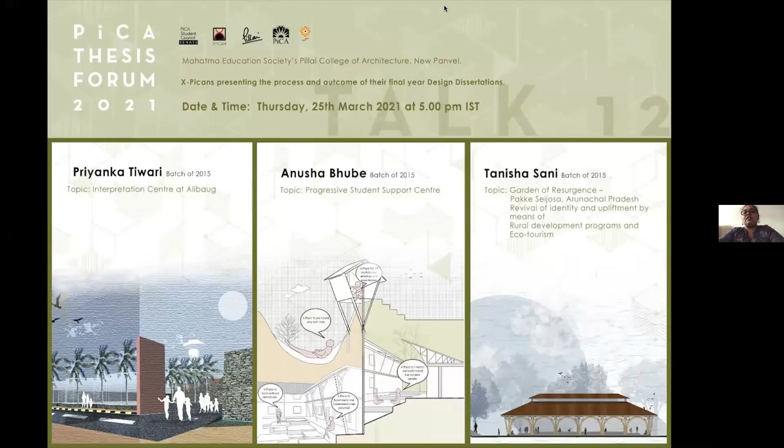Hello, am I audible? Yes, ma'am, you are.

Sorry. So Anusha will be talking about her experience designing Progressive Student Support Center, whereas Tanisha will be showing her project, which is titled Garden of Resurgence. Her site was in Arunachal Pradesh. It's basically a revival of identity and upliftment by means of rural development programs and ecotourism.

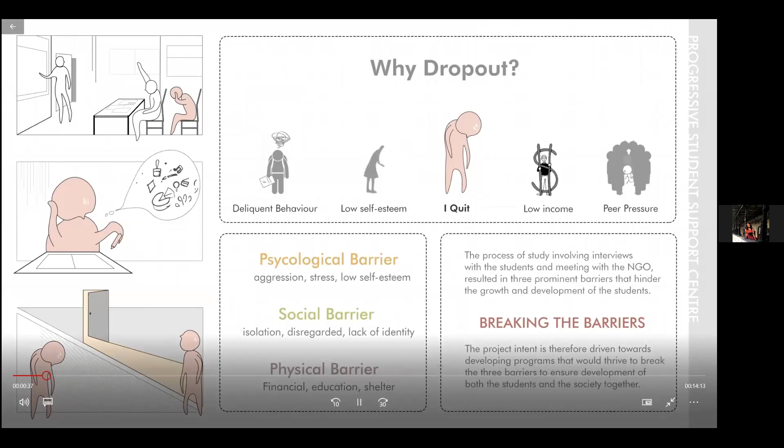This project is an attempt to aspire, nurture, and empower the dropout students. In order to achieve this, they need to be provided with a 24/7 positive environment. The idea is to impart education not only in theory but by actual physical exploration. The project caters to various age groups, which will aid to develop a sense of responsibility amongst the elder students. It inculcates sensitivity and preservation values, which can be done by the practice of sustainable living.

Maitrakul is the organization that this project is catering to. The organization is currently located in Bapgaon village, which will later move to the proposed site in the Bapsai village. The site location was extremely important in order to actually make a direct contribution to the betterment of the community and also in order to inculcate sensitivity towards nature. The site is located in the medium-sized village Bapsai near Kalyan. Although closer to nature and smaller communities, one still has access to Mumbai suburbs.

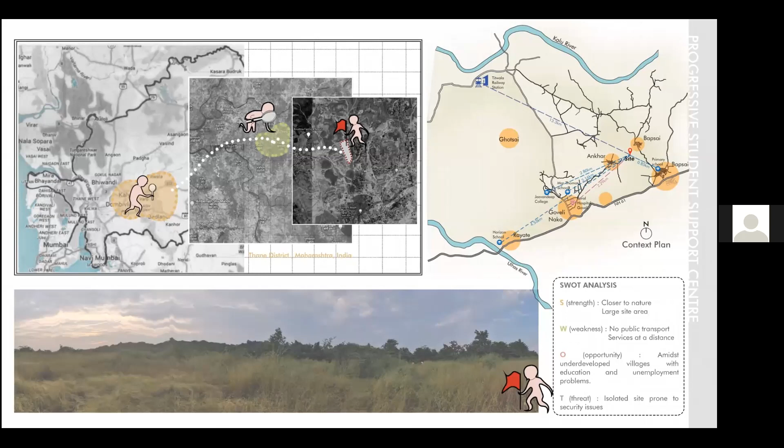Shikshantar and Vigyan Ashram contributed to understanding the user, workshop spaces, agricultural inclusions, and the incorporation of recycling in sustainable living. While SECMOL deals with student rehabilitation from a more hands-on exploratory learning approach. The inclusion of various types of institutions helped in designing an appropriate brief to cover all user needs. Kalyan having a history in Vada architecture, being the traditional residential form, the planning was done on the basis of the Vada concept, hence the grid planning.

The central large open space between the private and public space comprised of a green space, outdoor sitting or gathering space. Each space was provided with a semi-open space. The geometry allows for a proper distribution of public, private and interactive spaces. A concept of tree house was introduced as the students come from a disturbed background and this helps them relive their childhood. This space can be used for counseling units or for group study purposes.

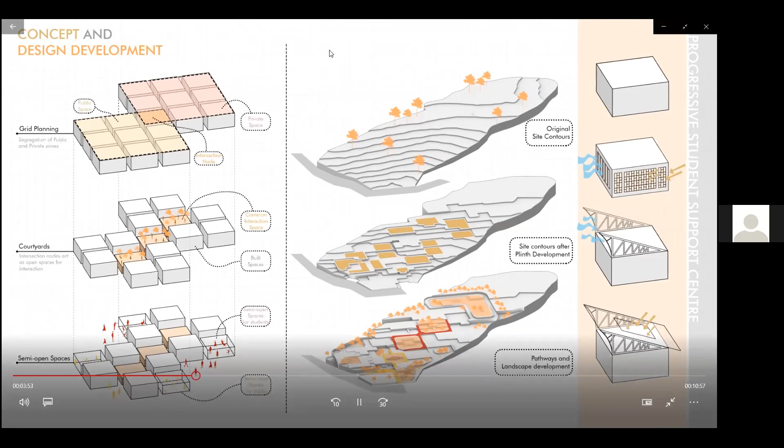The site is located in a rural context without a lot of dwellings around it. Agricultural fields are located adjacent to the site. The vehicular movement is restricted to the entrance, beyond which only pedestrian circulation is allowed.

The site has 3 entry nodes, 2 for vehicular circulation and 1 a stepped path that also provides for public seating or gathering spaces. The administration block overlooks the seating and keeps an eye on the entry and exits of the site.

A semi-open pavilion is placed adjacent to the main circulation path, giving an experiential view of the stepped courtyards. Right above the pavilion, an exhibition hall is provided for the public. The courtyard adjacent to it has a stepped pond which can be viewed from the pavilion and the exhibition hall.

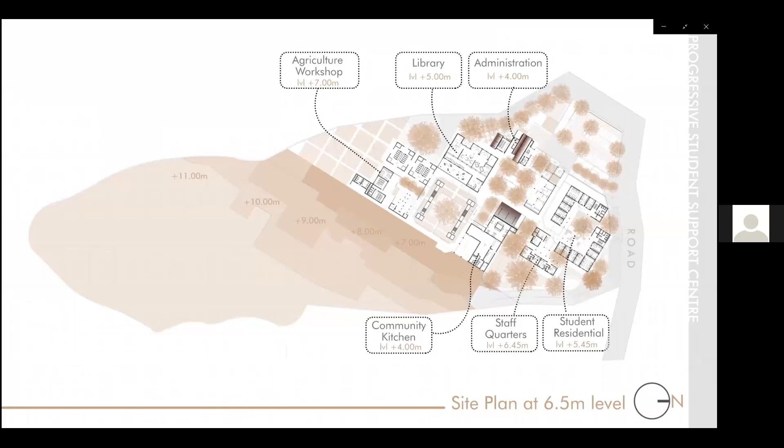The learning spaces start from the middle contours overlooking the two central courtyards. The agricultural block and the dairy are adjacent to each other with a private agricultural field provided for learning. The courtyard with bamboo tree houses overlooks the poultry farms in a main gathering space catering to events such as lectures in the open, performances, etc.

Such an informal space changes the dynamic of the learning in Maitrakul, catering to the needs of the children coming from disturbed backgrounds. The next set of blocks, carpentry and fabrication, sewing and electrical workshops, produce a lot of noise and disturbance and therefore are provided at the topmost contour away from the learning units such as the library. They overlook a stepped courtyard, increasing interactions amongst the various workshops.

Following are the learning units in the play area. This includes a cycle track and multiple grounds for different sports. The topmost end of the site is left untouched for future development.

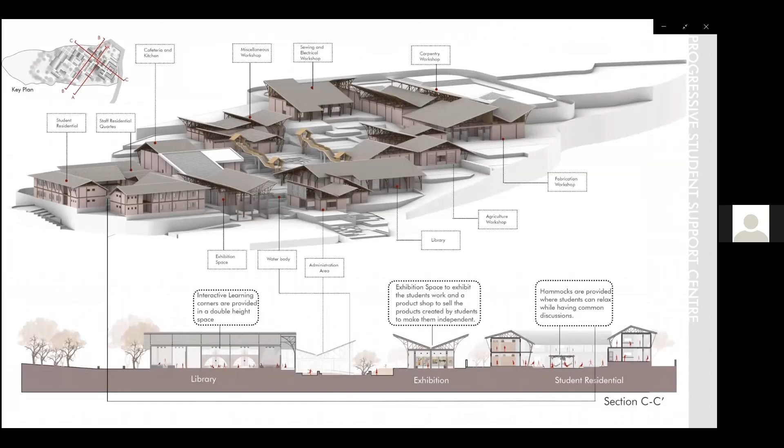The roofing of the blocks is designed to make the most of the natural light already available on the site. It also helps in differentiating and developing the public and private activities on the site. The administration's roof opens up on the outside as a welcoming feature for the outsiders. The pavilion and the exhibition focus the view of the visitor towards the central courtyards. Various spaces are designed at the landscape nodes in order to promote interaction among the students as well as the community.

The dynamic of the roof can be clearly understood in these site sections. The first site section shows the inclined roof of the kitchen, which provides an open public seating as opposed to the enclosed private dining below it. This open seating is the extension of the first courtyard, encouraging interactions.

The second section shows the privateness provided by the roof of the library from the public open space next to it. The library extends to a private node that provides a calmer environment to study in.

In the administration block, you enter a reception area which overlooks a small courtyard and the pavilion, which serves as an inviting waiting area. A small common assembly hall is provided to orient new students into the campus. The exhibition displays the work done by the students in Maitrakul.

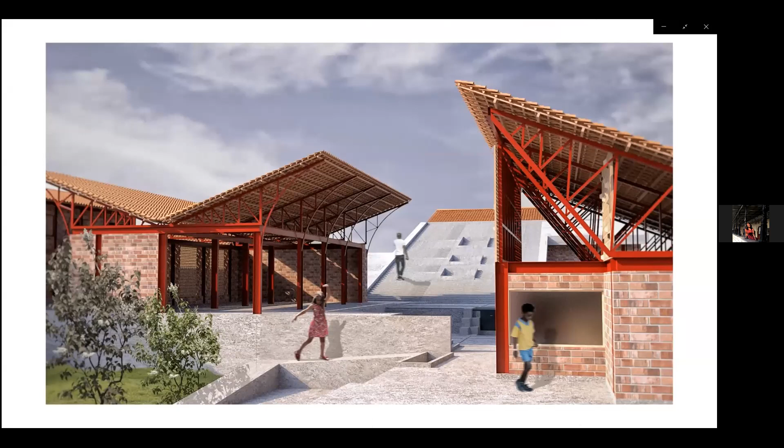The residential block has a central courtyard and the form gives it a certain privateness from the staff residential, making it much more comfortable, carefree places for the students. A similar stepped courtyard helps in unifying the different contours, creating interactive spaces.

There are two residential blocks of 2 stories consisting of 14 dormitories, one sanitation unit, and a staircase block separating the two. The slant columns that are attached to the roof are a feature of this block. The windows have a slight protrusion into the passage for an informal seating area.

The staff residential features an experiential corridor that connects to the rest of the site. As the staff is demanded to be aware of the whereabouts of the students, circulation becomes key in the designing of this block. The staff block consists of 6 units, each housing 2 staff members.

As a design element, a twin window system is provided to control the harsh sunlight that might enter through the south facade. This facade is made of a jali made of terracotta tiles that help in temperature control. A bamboo facade system is also used in these blocks to dissipate heat. These bamboo logs are replaceable.

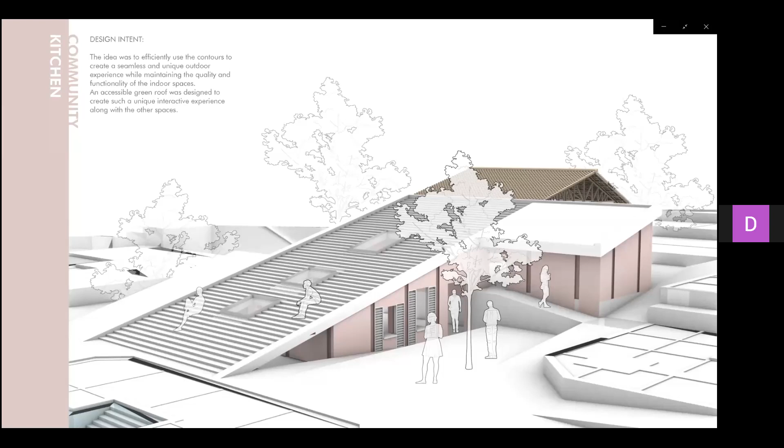Food is produced through farming and poultry as raw materials, further providing jobs to the women in the village for kitchen maintenance and cooking. From the main passage, a ramp goes down to the dining area. A foldable table unit is placed in the periphery, which makes the dining room more dynamic for mass buffets and other gathering events.

The library block contains reading tables, bookshelves, informal step seating units, and small booths for group study. These spaces have partition walls that do not go up till the roof. The feeling of seclusion is eliminated and this unifies all the functions of the library. The library opens out to the private garden to encourage outdoor studies.

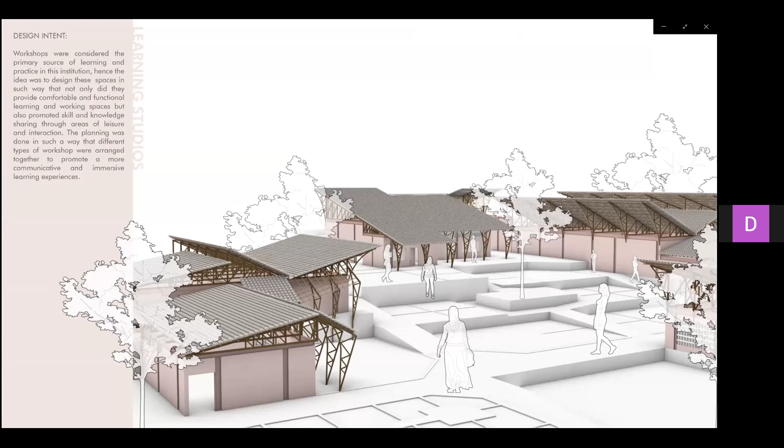Further are the learning studios, which are designed as a multi-access space where rudimentary education is provided for the dropouts to continue further schooling and gradually build their confidence. The varying sizes of the classroom spaces allow the social anxiety to be broken gradually and induce participation. The blend of nature and playscape gives the child a feel of learning in a park, which improves concentration and reduces stress.

An open plan is provided for the photography and art workshop with multiple spill-out spaces. A classroom for solar and biogas learning is also provided. The terracotta tiles cast a beautiful shadow in the photography workshop, which helps in the photography.

The agricultural block encompasses a poultry farm, classrooms, soil testing lab, a dairy, and a small private agricultural field for learning agricultural practices. A brick jali wall helps provide privacy to the classrooms, yet allows natural light to enter the space. The carpentry and fabrication workshops have a workspace area and they spill out to semi-open areas through revolving jali doors. The workshops are placed together due to the same design requirements, heavy lifting areas, noise reduction, and hands-on learning.

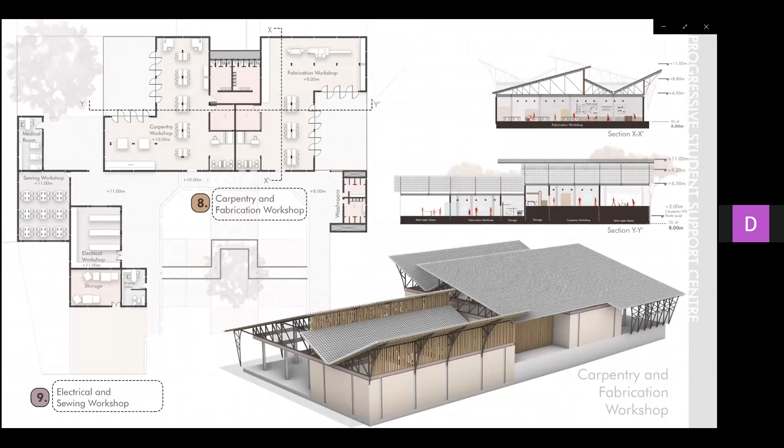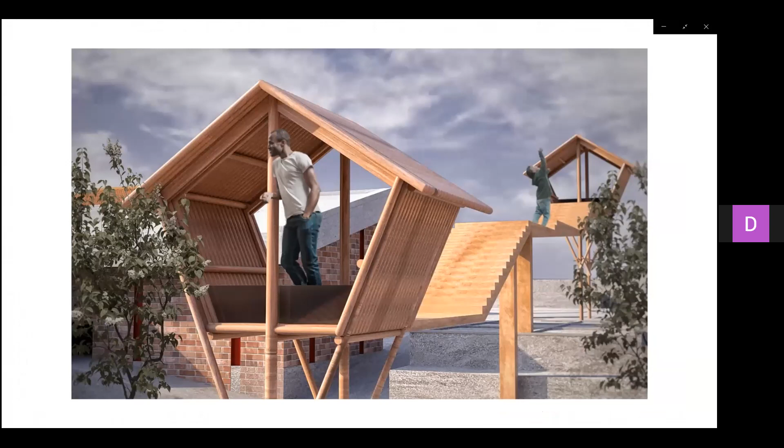Punctures have been provided in the roofing system to allow sufficient natural light to the spaces. An open plan is best suited for such workshops for different modes of teaching. An open space is provided in front of the electrical workshop for a motor workshop when needed. A first aid unit is also provided for safety concerns. Further are the AutoCAD details for the project.

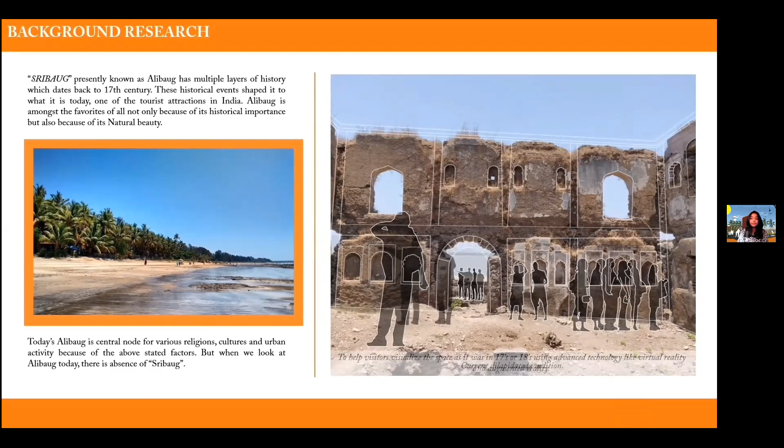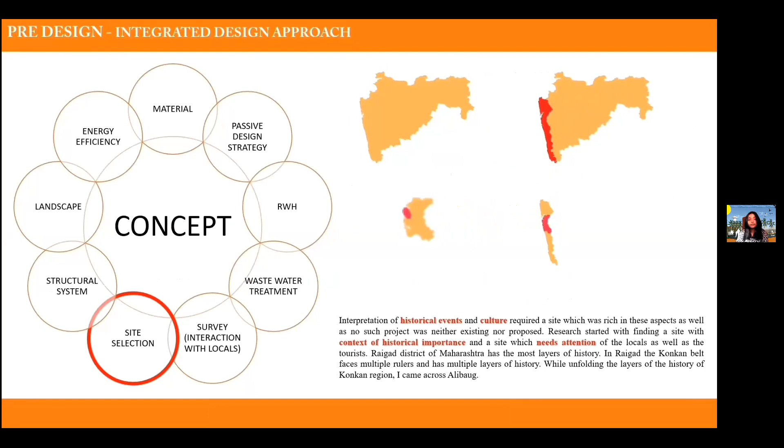An integrated design approach was formulated, starting from site selection, studying from macro level Maharashtra to micro level Alibaug. Site was selected based on the DCR, Google map and going on site. Site analysis was done. Site context was studied from macro to micro level. Kolaba Fort is just 1 kilometer away from the site, and the site is adjacent to the Alibaug beach. Other public amenities are within 1 kilometer distance.

Accessibility to Mumbai and Pune was studied both by water linkages and road linkages. Landscaping on and just around the site was identified and used for the proposal. Around 90% of the vegetation was retained as it is on the site. Local and traditional materials were identified and studied. Passive design strategies for Alibaug specifically were studied.

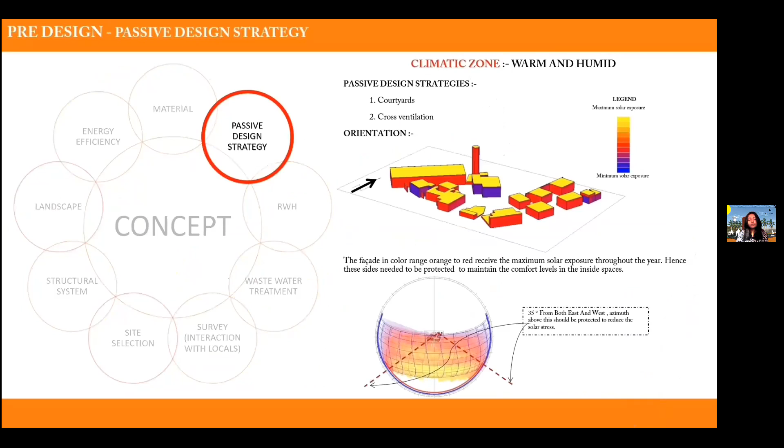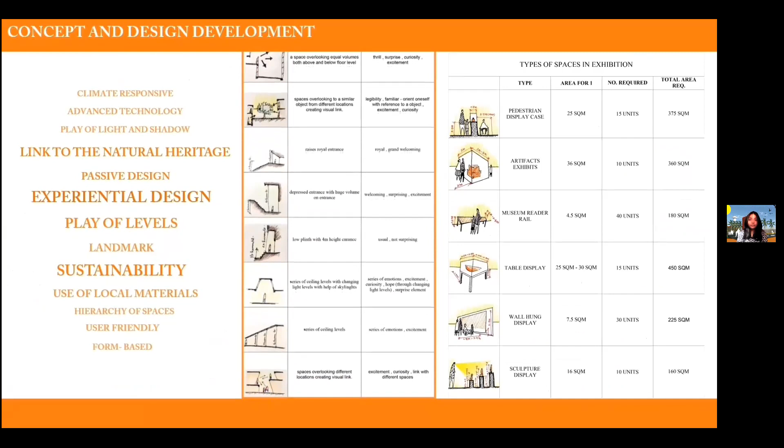Before getting to site zoning stage, a word cloud was made on my intentions and aspirations regarding the project. A study of volume, light and emotion was done. Types of exhibitions, its style, sizes, etc. was studied. Then the character of Alibaug was studied through a series of images within the city.

Few elements were abstracted to be used in design, namely the narrowing street, wooden joinery, watchtower, surprise element, abstracting trees, break spaces, traditional construction, development of spaces around the water bodies. With all these studies in the conscious mind, I moved on to site zoning.

In the site zoning, first the proximity chart was prepared between the blocks, namely admin, entrance, exhibition, library, workshop and convention. Second is the space and relationship diagram. Then the proximity and the space and relationship diagram were overlapped. To this, visual links were established and I came up with one bubble diagram.

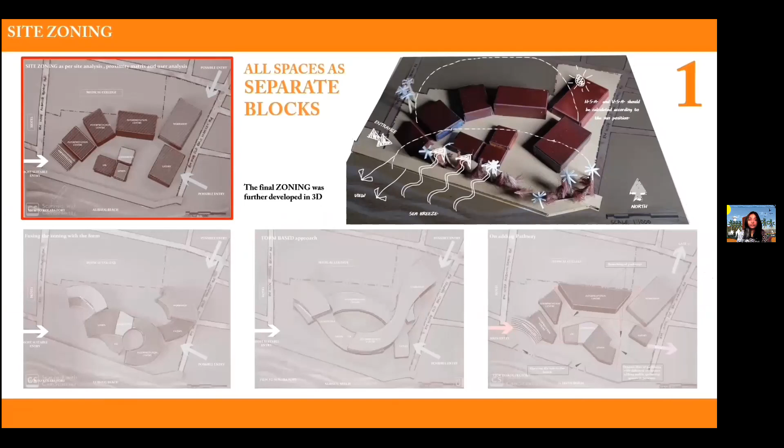This bubble diagram then was experimented, analyzed and studied through different zoning options, out of which zoning 2 is the most similar to the proximity chart established previously. This zoning was further studied through 3D blocking. So this is the first option in which I have just extruded the zoning on basis of area and volume and studied on basis of climatic aspects.

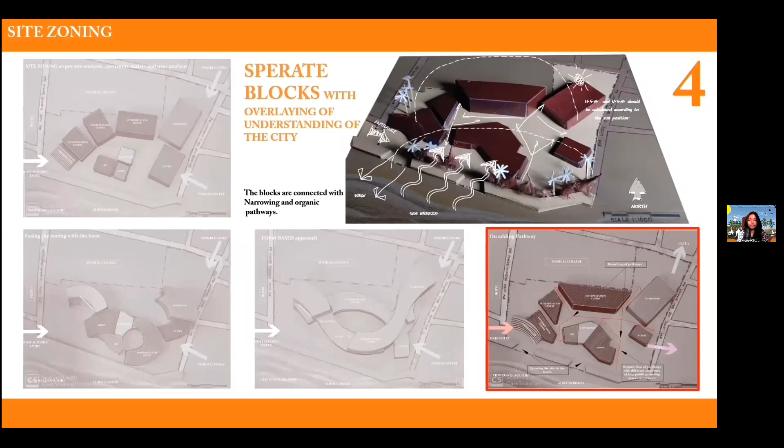The second attempt was by combining all the blocks and studying them as one single structure. This third option was a form-based approach to the entire concept. All these options did not actually reflect the pre-design study which I already had, and hence the final attempt was made by overlapping the understanding of city through images, which includes connecting the blocks through narrowing street, adding surprise elements in between, then creating visual links between the blocks. And this option was further developed as my site plan.

Here are a few points about the project, like appropriate architecture design used, renewable energy resources used, how water and earth management is done, and use of appropriate building technologies. Talking about the site plan, this is the main Alibaug Beach Road, the main entrance. Towards the left is the parking, towards the right is the installation space. And these are the blocks, namely the Interpretation Center block, library, admin, restaurant, and workshop block.

Now for a public structure, it is very important to design the outer area as well, because the outside is where the public interacts with the structure first. The footpath area in front is designed in such a way that it could incorporate small local stalls during the evening. Then the entire area, which is common for the center and Alibaug Beach, could be developed as public plaza. The boundaries of the site are kept porous. Also, a proposal for floating deck could be made for conducting ferries to Colaba Fort.

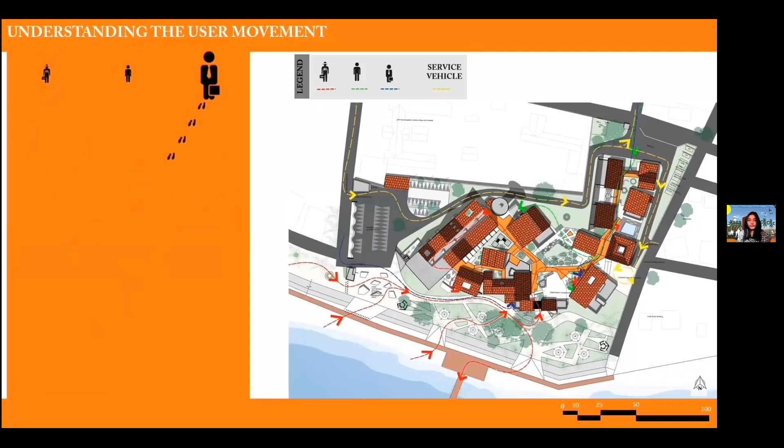Understanding the user movement was very important to place the interaction area. There are basically three types of users: the tourists, locals, and the staff people. All the possible user movements were mapped, studied, and analyzed to get a location where the interaction space could be placed. Through this study, this location was selected and developed as local and traditional interactive space, that is the Mango Garden.

Talking about the site, it is 22.5 thousand square meters, out of which 25% is complete green cover, only 15% is road coverage, and 35% is built. Details of the plan will be talked about later in the presentation, but the relationship between the built and unbuilt can be seen. The debris and composting pit are placed at this corner because this area is not used by visitors. Rooms like generator rooms and other services rooms are provided at this corner of the site.

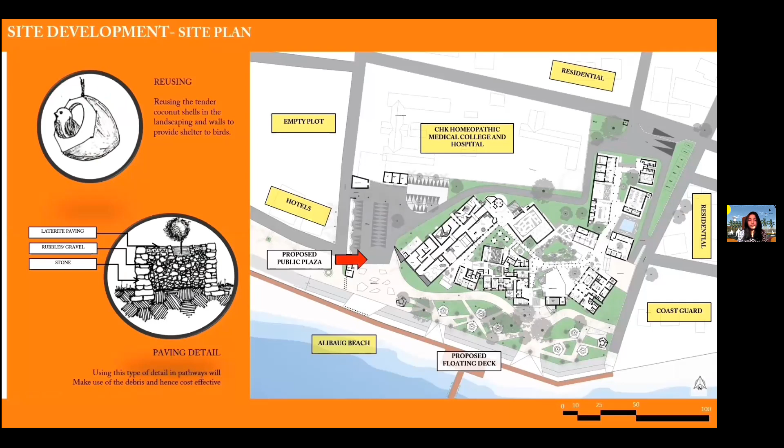Few details like incorporating tender coconut shells in the walls to give shelter to the birds and using this type of detail for paving will ensure A, cost effectiveness, since using debris, and B, help replenish groundwater. Here are some views.

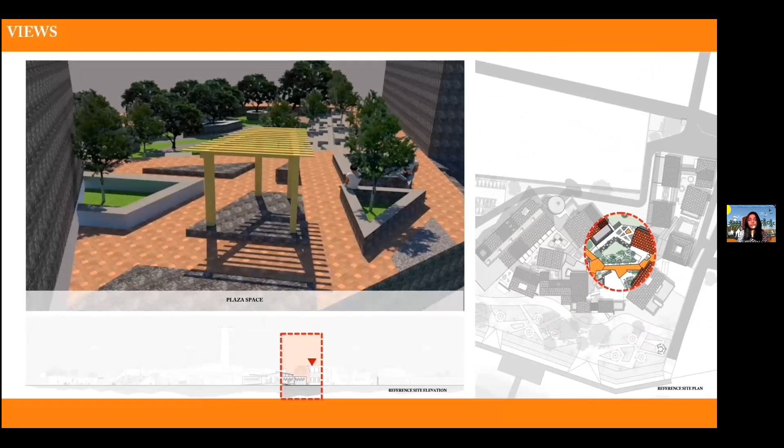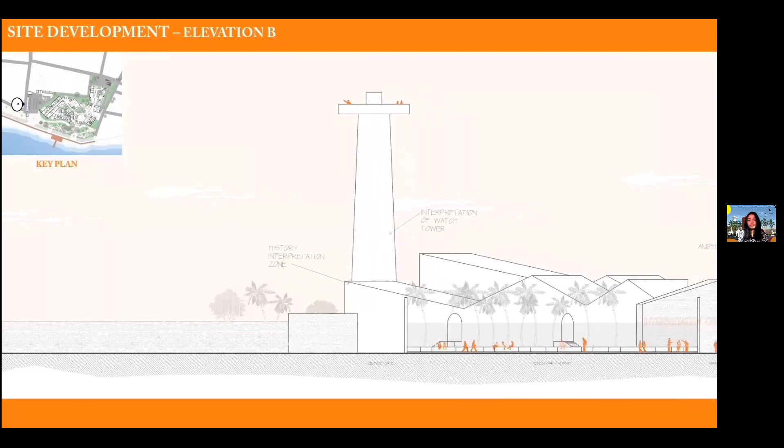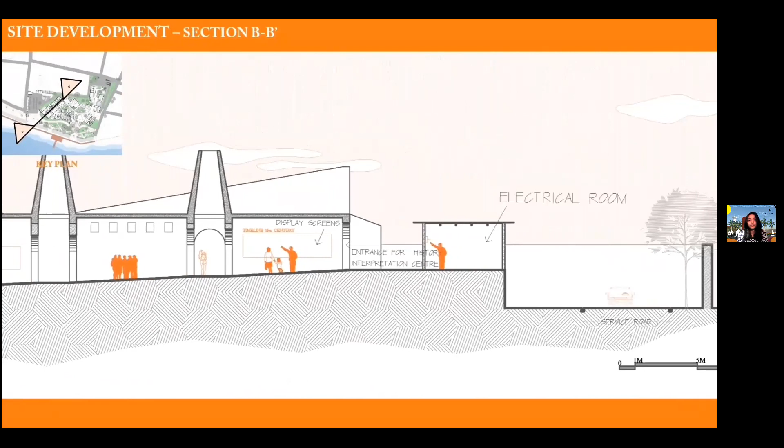These are drawings of interpretation center block. The interpretation center block is divided into 5 segments, namely History Interpretation Center, Sculpture Display and Research Section, 3D Hologram Projection Theatre, Audiovisual Room, and Watchtower with Augmented Reality Screen. The History Interpretation Center has 6 parts divided on basis of background research study done in semester 9.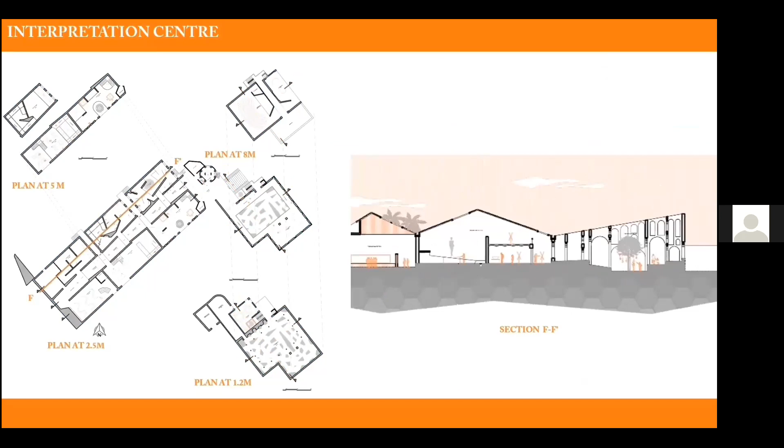Section FF cuts through the beach to the installation spaces, amphitheater and history interpretation section. Section GG cuts through another section of history interpretation. Section HH cuts through the passage in the history section, which has skylights.

The workshop block majorly has shop, exhibition, pottery and workshop, cooking workshop with a bio-waste collection room, joinery or carpentry workshop, staff room, and toilet block. There are few concepts regarding the space. Here this area has flexible use, can be used as break spaces or as a lecture space for one or all the workshop blocks. People using the workshop area on regular basis can access the workshop block from this side and the tourists can access the workshop block from this side.

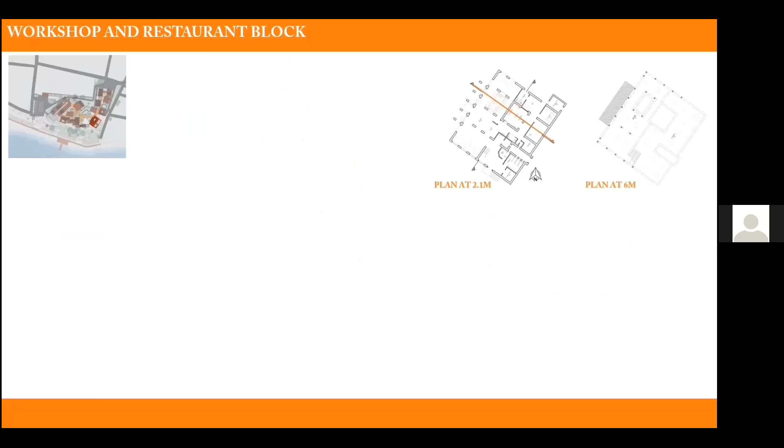Few other break spaces like the lily pond and the courtyard with seatings around the trees are also designed in between the workshops. Here section JJ cuts through joinery or carpentry workshop, courtyard and staff room area. Section KK cuts through exhibition, lily pond, cookery workshop, staff room and toilet. These are floor plans of restaurant block. Section LL and MM cut through the internal courtyard showing the cross ventilation and relationship between user and space.

The library block is G+1 structure. These are the floor plans. Section PP and QQ show the user, activity and space relationship along with passive design strategy. Elevation U shows how openings are designed in the space. These are plans of admin block area consisting of locker room, ticketing, office and conference area.

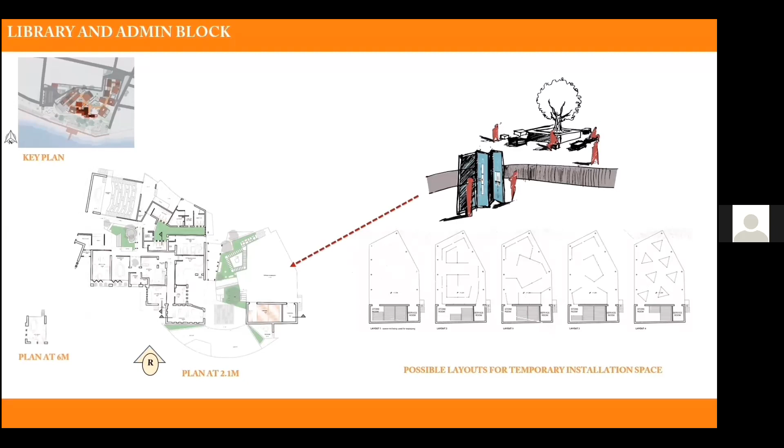This is an open to sky space provided for temporary exhibitions and installations. It has a storeroom attached wherein all the panels can be stored and used as and when required. This illustration shows the flexibility of space according to the use. Elevation R is from the beach side. Section SS cuts through the office area showing the cross ventilation and volume of spaces and activities related. Section TT cuts through locker room, entrance area lobby and temporary installation area.

The central lobby pergola is based on the concept of canopy provided by different native plants of Alibag. The gap between the pergola and the roof in the southwest side is provided with tinted glass which will illuminate the space during the low rays of evening golden hour.

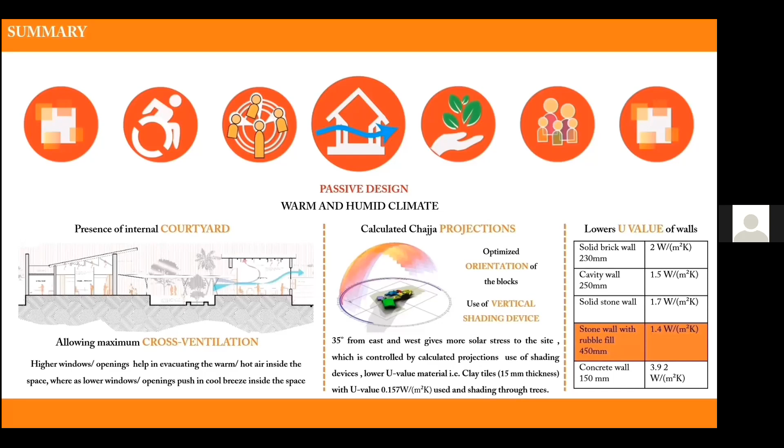To sum up my project with few key features: use of passive design strategy according to the macro and microclimate study by providing internal courtyards, ensuring maximum cross ventilation, fixed orientation according to the analysis, designing shading devices, chhajjas, using lower U value material for construction. Interactive design. Advanced technologies like augmented reality, audiovisual installation, video wall, interactive display and 3D hologram are used to make the design more interactive.

Attempt for barrier-free or universal design. The area marked in red in the plan are slopes which are provided in all common areas for ease of accessibility for physically challenged people. Color contrast is used in pathways. Also, provision of parking for physically challenged people is provided.

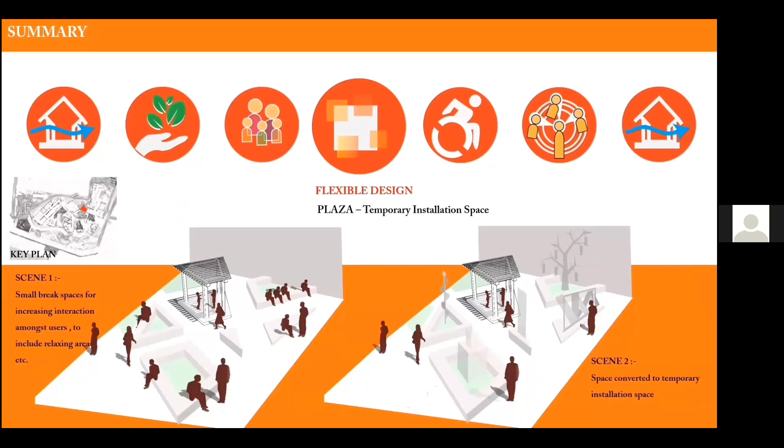Promoting more flexible design. This is the entrance plaza area illustrations during 3 situations. Scene 1 with no installation, Scene 2 with only few installations and Scene 3 when the whole space is used for installations. Second area is the plaza between workshop and interpretation center area. Scene 1 illustrates when the space is used as break space and Scene 2 when the space has displays exhibited. Promote community design.

Many community gathering spaces are provided, like the conference, mango garden, amphitheater and plaza areas. An attempt is made at sustainable design: use of local materials, energy efficient design, use of solar panels, 25% complete green cover, rainwater harvesting and STP.

This final section is about ARD. The first is electrical layout. The diagram here shows how electricity is distributed from power station to site and site to the outlet. This is a brief calculation of electricity consumption of the site.

Then is the water supply and firefighting layout. Here is the calculation of water requirement, tank sizes, etc. This is a schematic section of water layout. Stormwater and rainwater harvesting layout.

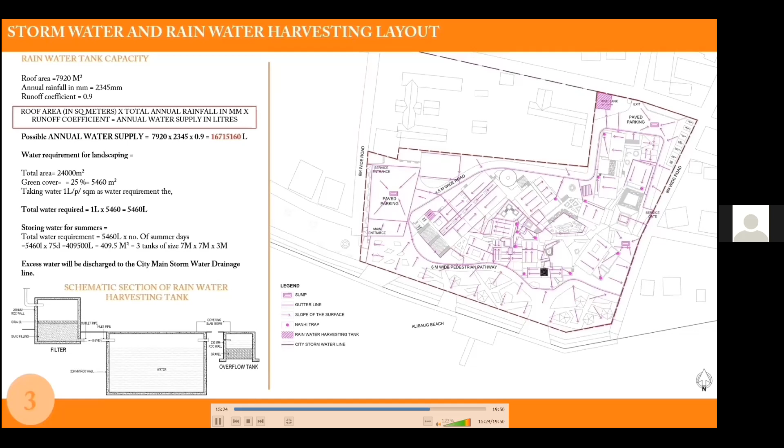This is the calculation of rainwater harvesting tank capacity according to the water requirement of landscaping during the summer season. This is a schematic section of rainwater harvesting tank. Drainage layout. I have used DEWATS system, schematic working of which is explained here.

This is the calculation of tank sizes for the same, and these are the varieties of plants to be used for purifying the water. After purification of water, it is allowed to fill the lily pond, and overflow of which is stored and is used for landscaping and flushing purposes. Around 62% of the total water requirement of the site is generated by DEWATS.

Solar power layout. I have used clay tiles embedded with solar cells on the sites which receive the most sunlight. This is a little calculation of amount of electricity generated by them. The generated electricity will then be supplied to the grid and not be stored in batteries. On a sunny day when the solar panels work with full efficiency, around 160% of the daily electricity consumption could be generated.

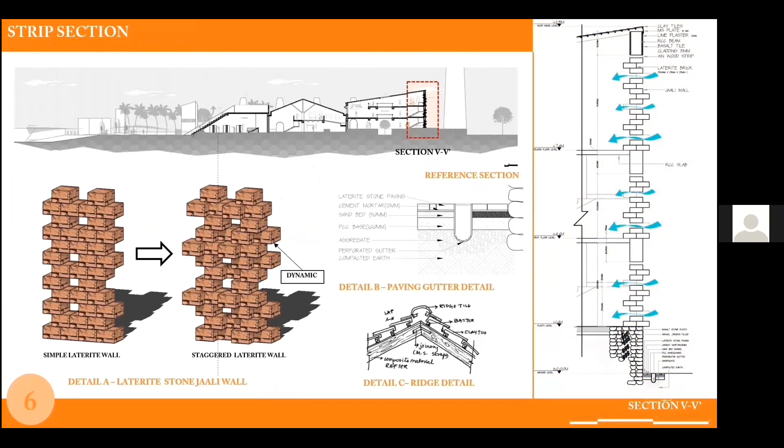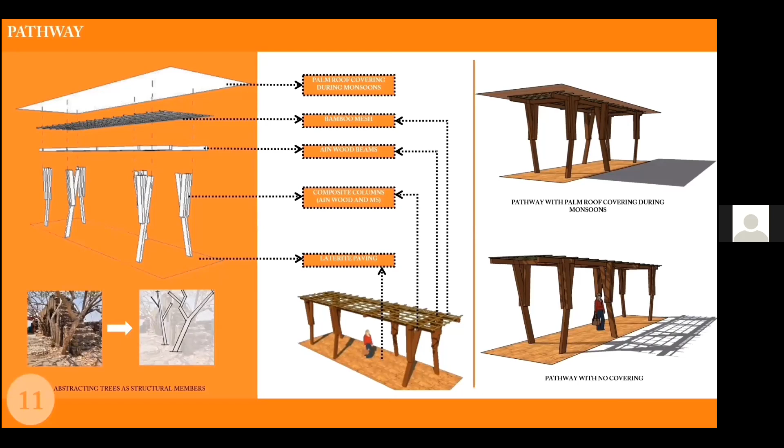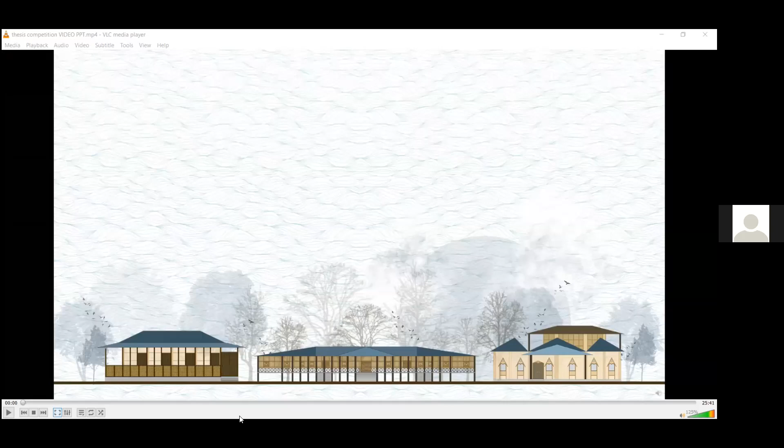Good morning, everyone. My name is Tanisha Sani, and the topic for my thesis project is Garden of Resurgence at Pakke Seppa in Arunachal Pradesh. The topic revolves around the revival of identity by means of rural development programs and ecotourism. The project being placed in Arunachal has an integral part to play in Indian history, but most of it remains unaware. Architecture helps to reveal who matters in the complex and plural society.

It is a setting through which we express ideas like democracy or freedom or other kinds of national values, and this colors the way the citizen sees and perceives the government. One would be surprised to know that the ongoing conflict in Arunachal has roots back from the ancient monarchical era. The timeline starts from 1st century. Traces were also found in the medieval monarchical era.

Coming to the timeline of post-independence, years marking the McMahon Line and Northeast Frontier Tract activities formed the major points of concern. Arunachal Pradesh, an area under constant threat of anti-national ideas, a paradise of conflict. The two conflicts are the Indo-China conflict and the Bodoland conflict.

Did you know in 1962 people fought the Chinese soldiers with vessels in their house just because they wanted to be part of India? The whole state of Arunachal Pradesh is incredibly picturesque, and talking about the geographical aspect, the state lies in the valley, which is why the weather is extremely pleasant. But the concerns raised have

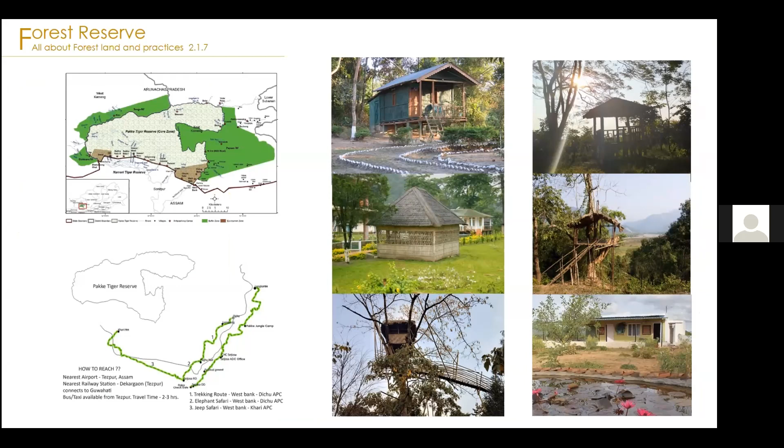The Pakke Seijosa Administrative Circle is spread 14 kilometers in length and has the Pakke Tiger Reserve adjacent to it. Along with the forest reserve, it has accommodation, viewing facilities and a nature interpretation center. A variety of floating users traced includes tourists, artists, students, photographers, researchers and activists.

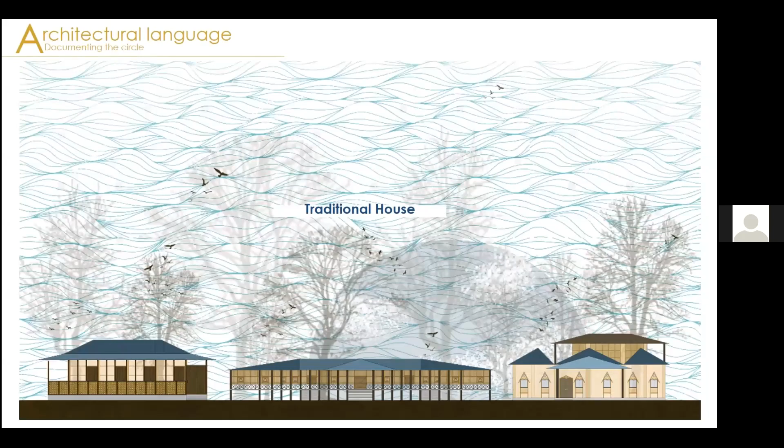The architectural style and language is seen to be changing, where it can be grouped in two types, the traditional house and the modified modern house. These variations have led to change of traditional materials to modified materials, leading to the change in architectural elements. The major issues faced by the people here are flooding, hunting, disoriented youth, earthquake prone area, available land for use,

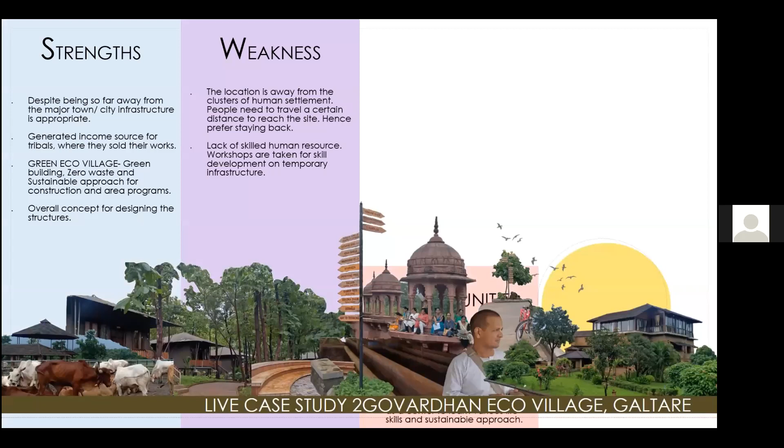and with the help of this database, the conclusions derived were based on the ideas of social enhancement, economic empowerment, and cultural viability. The case study of Hemalkasa helped to understand how ground-up interventions could be done for a tribal area, whereas the study of Govardhan Eco-Village helped to formulate a guideline for area program and understand user involvement. The Yusuf Meherally Center showed how available resources can be incorporated to enhance the value of the project.

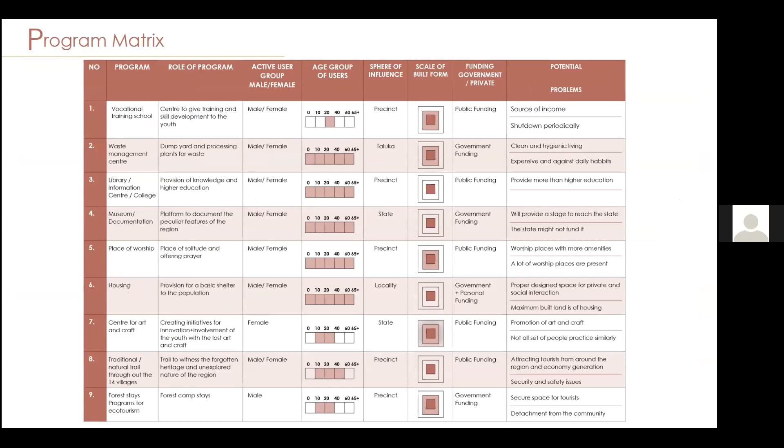The Sakar village case study helped in understanding the incorporation of biodiversity for the complete growth of the project, leading to the formation of a case study matrix. Similarly, a program matrix was a way to help shortlist the programs that would work in a region like this. The programs are judged based on certain parameters like the role of program, active users, age group, sphere of influence, scale of built form, funding, and potentials and problems.

A set of programs that would be accepted by the state as well as cater to the needs of the people and revive the identity without any conflict had to be considered. In a place of conflict, the main things compromised are the economic and education sectors and a place to raise their ideas and thoughts. So the main program would be the memorial structure that would cater to revival of identity and conservation programs for preserving culture and tradition.

Second would be the learning and economy generating programs, that is the vocational training center and accommodation programs to help run the entire project without economic barrier. Third would be the sustainable programs to make the project self-sufficient and give the concept of sustainability out loud. Last would be the subordinate programs that would complement the user activities.

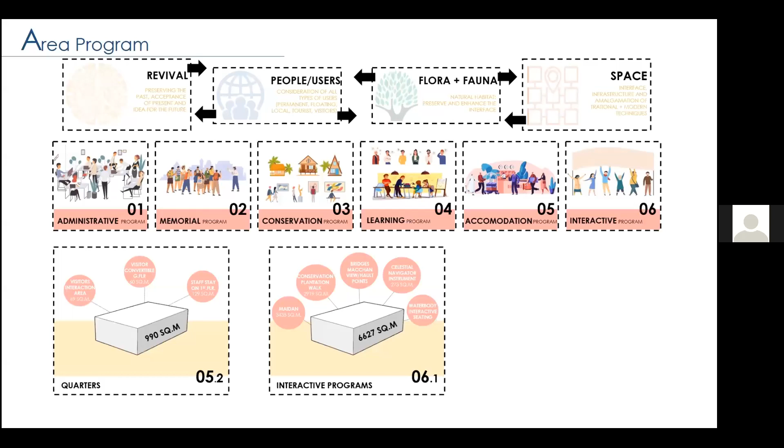For the site it would be low density and low rise typology, color theme landscaping, interaction with water body, interaction and halt points as positive distraction and easy wayfinding. For individual structures it would be access to nature, plantation along blocks, privacy and interaction spaces, viewpoints and community involvement

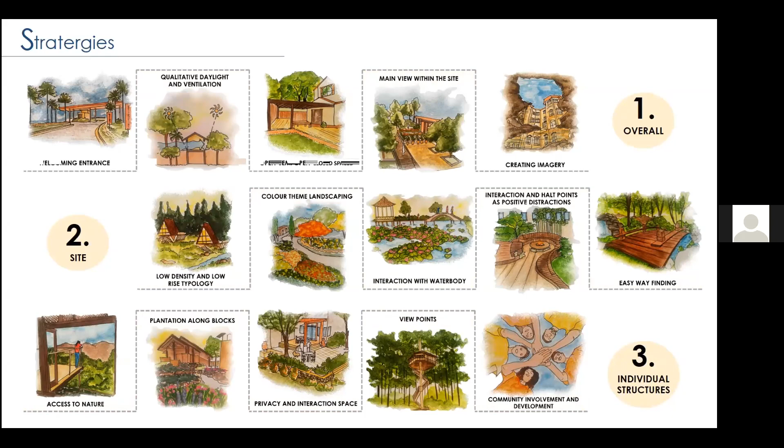and development. Here the proximity zoning and movement chart is prepared to jot down the proximity of programs for 3 user types. That is, for the tourists it starts from the entrance foyer all the way to 11 different programs ending at the nursery, while for the locals it will start from the reception market all the way through the 7 programs ending at the nursery. For the user it would start from the entrance foyer all the way to the 9 programs ending at the

conservation walk. The ideal building orientation is with respect to the earthquake prone area strategies and the aspects considered while designing are related to passive cooling and heating structures. The sun movement and wind flow with respect to vent are considered. North and east facade with circulation and halt spaces and south and west facade with accessible courtyard and vegetation buffer to help provide diffuse sunlight are kept in mind.

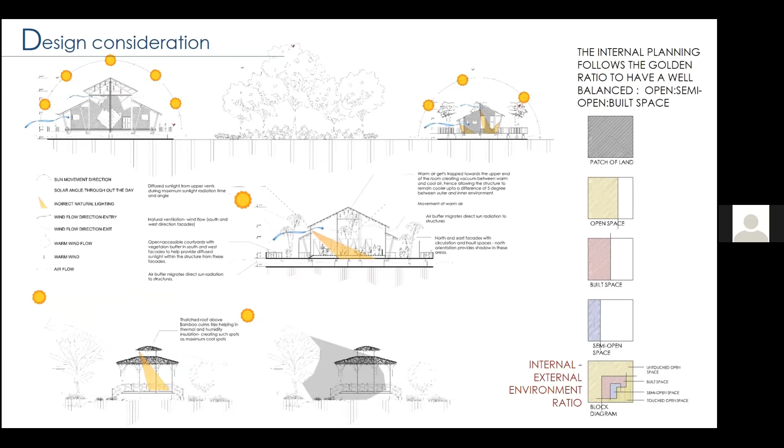To give a language and environment internal-external ratio, the structure is planned with golden ratio with respect to open, semi-open and closed spaces. A complete green structure typology is considered for the project where it focuses on conserving natural resources, flora-fauna consideration, use of natural and local material, is energy efficient, has healthier spaces and waste management. Amenities jotted in pairs are checked for contribution of noise and accessibility of flora and fauna around its premises.

The division of site is of the grid formed based on the Fibonacci series. The axis is formed from the center of the Fibonacci series. The primary functions at junctions and the secondary functions at intersections. The formed golden ratio pattern over the site. After the floods, the settlement, which was primarily the riverside cluster settlement, had started to move away from the water body. Adding a water body as an important feature would promote the idea of tackling the issue and finding solutions.

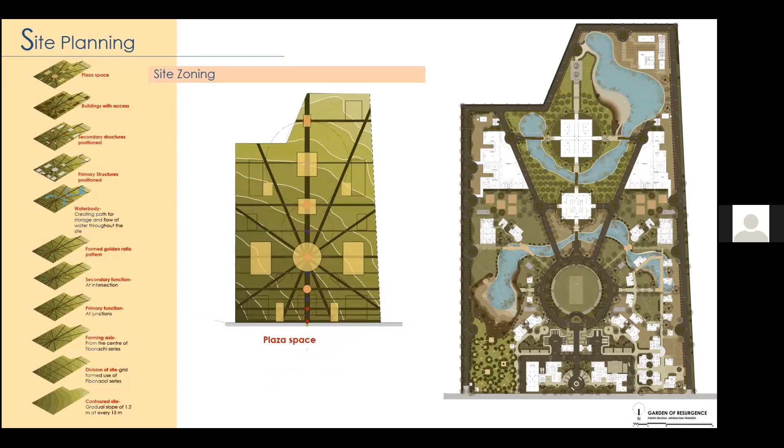The primary structures are positioned along the junctions while the secondary structures are positioned along the intersections. This is the demarcation of buildings with access. The plaza spaces in the final layout allow different sizes of open spaces surrounding the structures, hence forming the final site.

As this project requires a strong architectural language, it becomes important to have an overall concept to design the structures. Through image mapping, the following points are jotted which give the final concept of the sun, golden ratio and the hornbill. The agroclimatic zone is per-humid to sub-humid, which makes a number of diverse native plant species available. Two types of paved block systems are used for vehicular and pedestrian pathways. Native trees are alternately planted to get seasonal themes.

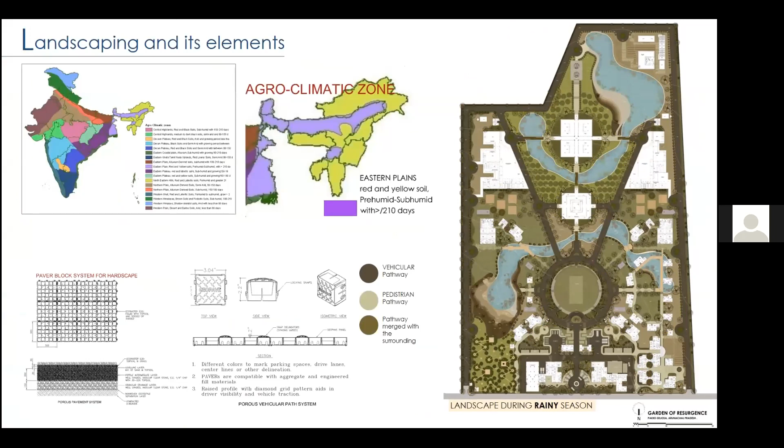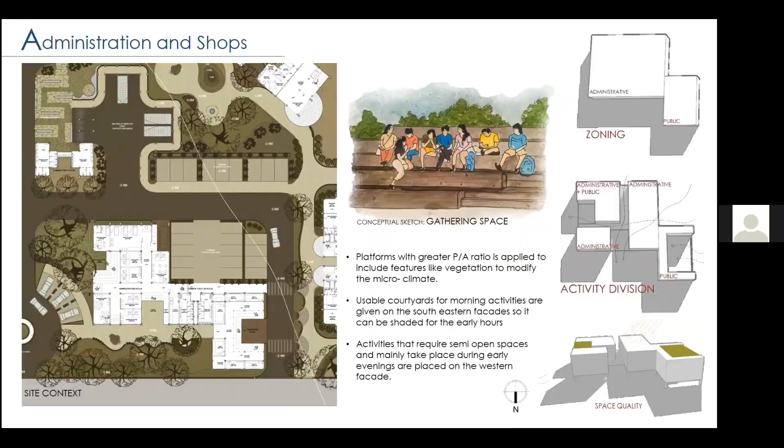The first block is the administration and souvenir shop located at north, closest to the main entrance near to the communal cottages. Usable courtyards for morning activities are placed on the southeastern facade to provide shade for the early hours. Those used during early evenings are placed on the western facade. Administration. The head offices are closest to both entries to the block. These rooms are naturally lit areas and have larger openings. Subordinate offices are centrally located so that proximity is maintained from all ends. The first aid room with minimum footfall is located at the southern facade with thin foldable window openings.

The building would have the semantics where locals would readily come, yet have a feature different from the current architectural patterns, which in this case is the roof. The souvenir plaza was imagined in thin frivolous posts of bamboo that would create an enclosure. The 6 shops are arranged along the plaza with a separate storage space as required. For this structure, the features are the bamboo arched entries to the shops. The roof profile is kept simple to maintain the balance of new and existing architectural styles throughout the block.

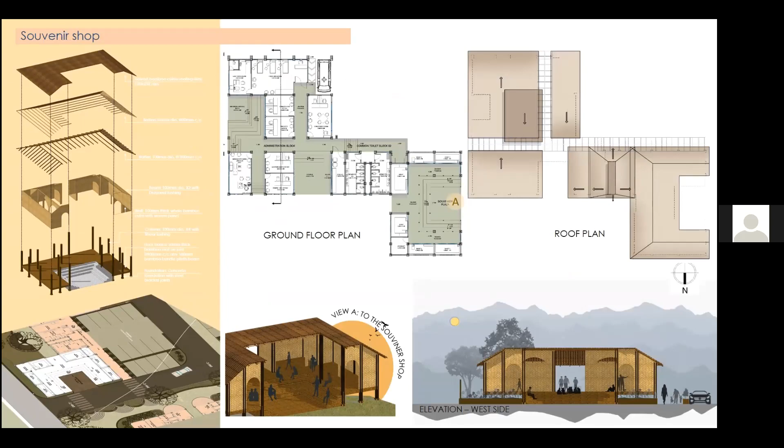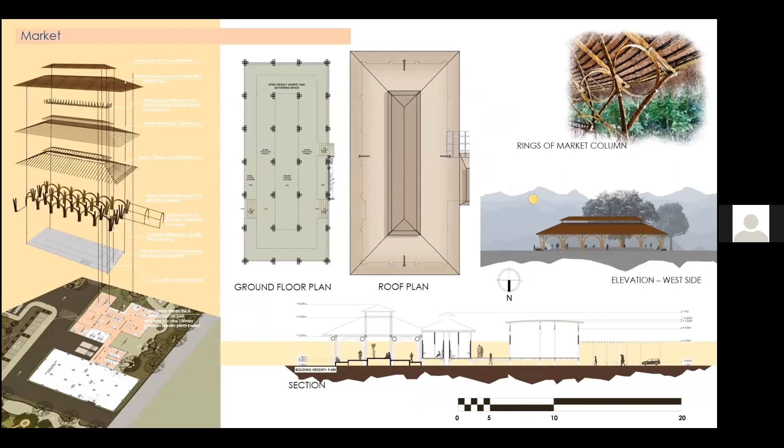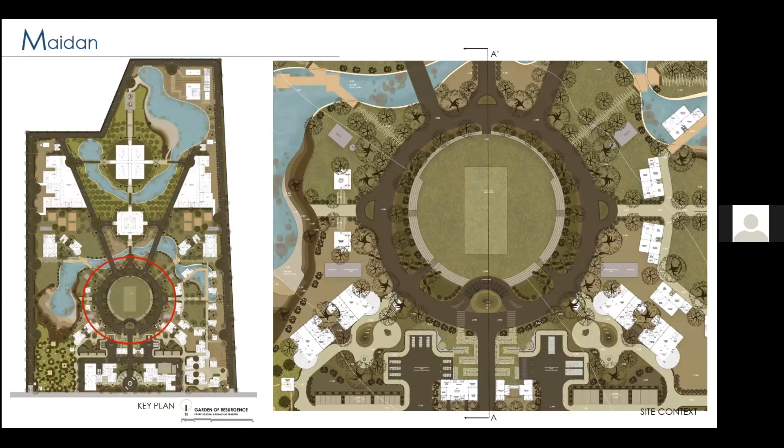The Maidan will be the first major activity to be centrally located. It will give a distant view to the memorial, which will play as the backdrop to the Maidan during festivals. The section explains the different step levels and the conceptual sketches of stands placed during festivals and kids socializing at the steps of the Maidan.

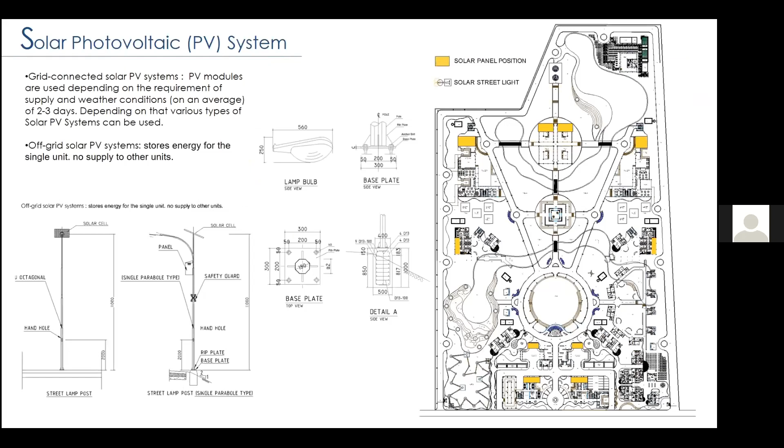The layout demarcates the solar panel positions required according to the grid-connected solar PV system. The off-grid solar PV system, that is the street lights, are located along the pathway at 12 meters from each other. The traditional houses are placed at parts above the water body to visually connect the relation of water with the state of Arunachal Pradesh. These houses act as the semantics of Arunachal without taking away its indigenous style.

The type A houses are derived similarly from the modified type houses where user types could be divided vertically on different levels. Being derivatives of existing form in style and feature, new technologies and techniques are added in construction. The type B houses are similarly derived from the Chang Ghar, where room activities are kept fixed with adjustable room sizes with the help of movable or temporary partitions. Here locals could come to stay and even make them homestays and cater to the visitors to promote homestay ideology for the region. All stays would be temporary.

The traditional houses have a biodigester toilet system, as their initial sanitary and decomposition processes of waste were natural. This system would fit the primitive concept but in a more hygienic and sophisticated way which would be easily adapted. The water body helps to change the microclimate around it, which are mostly open spaces, by evaporative cooling. The Bastis being a linear settlement along the river, similarly the water body is demarcated along the main revival programs. It also acts as the major landscaping feature where sitting and interactive spaces are formed accordingly.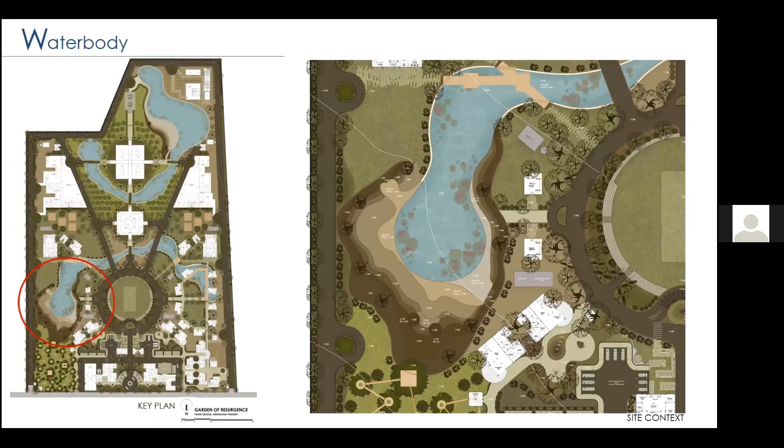The layout marks the rainwater harvesting system in two types: roof surface as the catchment area and water body as the catchment area. From here, the structures for revival can be traced. Diagonally flowing water bodies on both sides help create its imagery. The plantation ground beyond the memorial acts as the cemetery's abstracted plantation ground, while the memorial is the cemetery's abstracted structure. This becomes the pavilion type 1, pavilion of past.

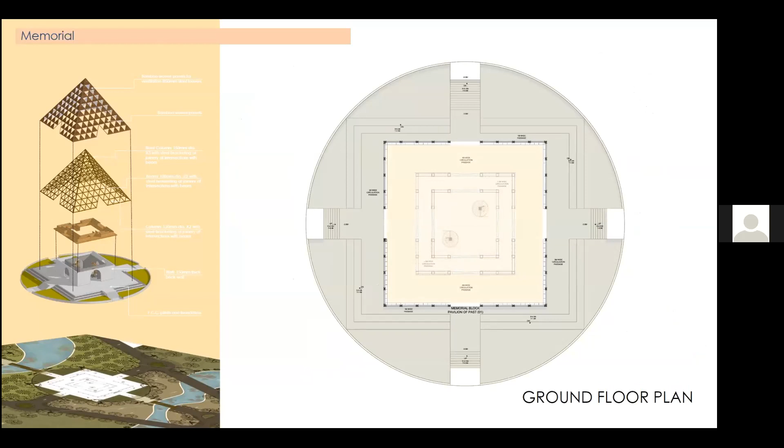The schematics were imagined as a massive monumental pyramidal roof with a core in the center that would allow the movement at different levels with arched walkways. Compartments at the inner facade would hold on to the remembrances of the deceased, be it human or wildlife. The pyramidal roof can be traced as one of structure construction. The pyramidal roof finds its inspiration from Central Asian architecture, and this influence also comes because Arunachal shares its boundary with China. Because of this, it plays as an evident feature for the memorial.

The memorial would create dialogue between the locals and visitors, and stories would be shared, acting as a symbol of primitive and modern construction techniques. The vocational training center and dormitories become part of pavilion type 2 and 3, that is present and future. The structures are located at both sides of the central axis and dormitories adjacent to the center. The schematics of both structures are approximately similar so as to act as backdrop for the memorial from all directions, and the core focus remains on the memorial itself.

Being one of the largest blocks in the project, it is critical to consider the connectivity with respect to earthquake designing consideration. The block is divided into smaller squares connected with courtyards. The courtyards are placed on the eastern facade, as activities like open classroom and workshop curriculums that do not require solar heating are conducted in this block.

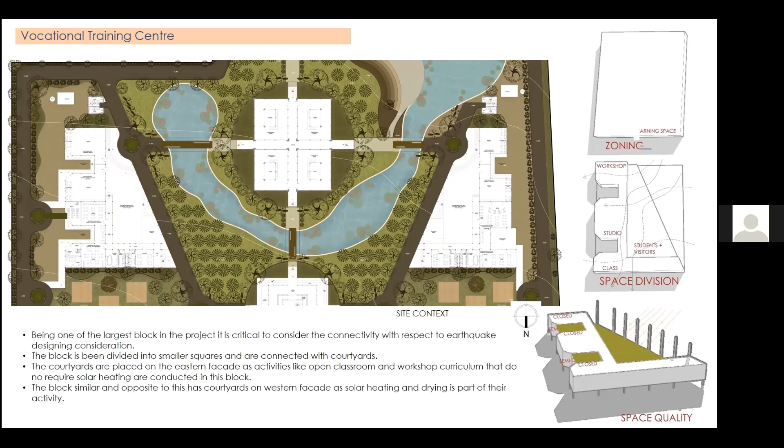The block similar and opposite to this has courtyards on the western facade, as solar heating and drying is part of their activity. The center at the left is for locals, with processing units of ornament making and handmade textile. The workshop area consists of animal husbandry and survival skills with subordinate facilities.

The center at the right is for visitors, with process units of bamboo handicraft and bamboo furniture. The workshop area consists of bamboo architecture and conservation program workshops, along with subordinate facilities. The blue marked spaces are those which require sunlight before noon, while the orange marked spaces are those which require sunlight even after noon. The sketch shows the conceptual view of the pavilion hall with bundle beam joinery details.

Foldable furniture is used for making space available as per need. Flexible use of space for different activities and capacity is done due to the unpredictable student footfall. The two different types present are the 6 bed sharing halls and the 2 bed sharing rooms. These are the foldable tables and beds used to maximize floor area.

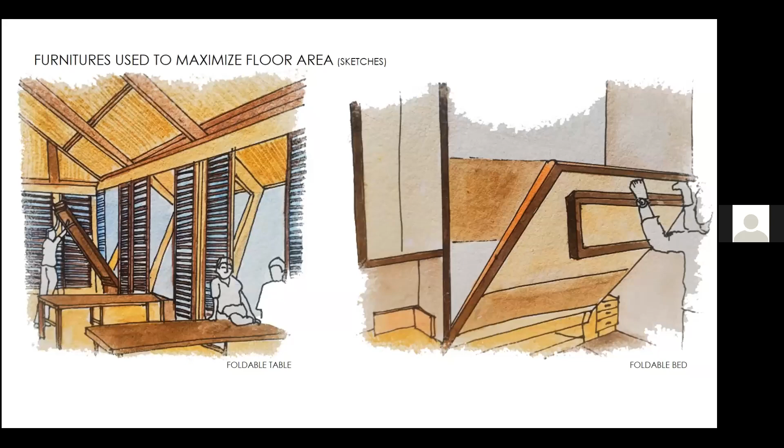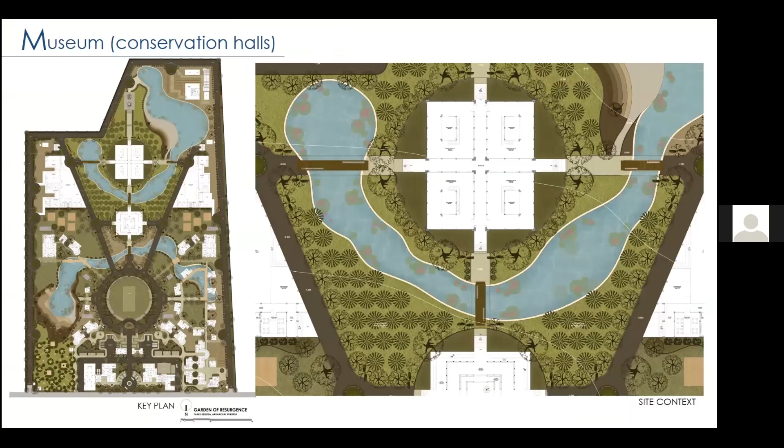The museum plays the role of conservation halls, which act as a place to know about the vicinity in depth. The through and through circulation allows free in and out movement to the visitors. The basic planning is again derived from the concept of Changghar, with natural light penetration through the roof and rain chain features. The conservational halls: the central core acts as a book reading space where the user could come in, pick a book and sit outside in open spaces.

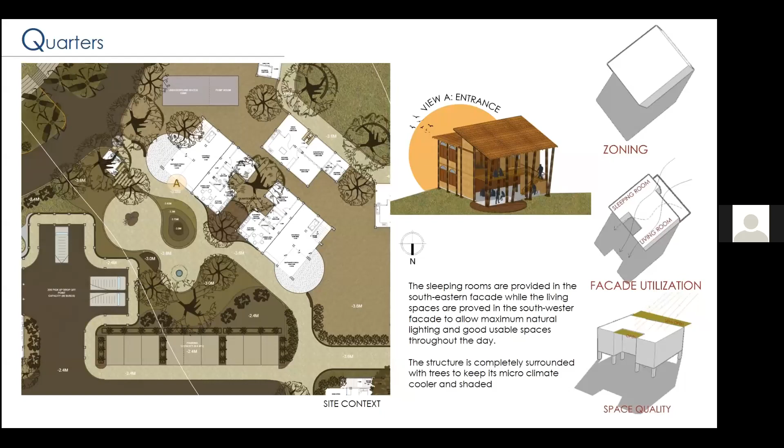The 4 conservational halls include culture and traditional, lifestyle, wildlife and recognition. The mezzanine will act as a viewing gallery and connect the halls at different levels. The schematics of the structure is conceptualized from the traditional Changghar as a mass structure from the exterior, while the interior space quality changes with the help of refracted light and a scissor truss beam column system. The special feature here is that the structure maximizes the use of natural light and ventilation, with trees completely surrounding it to keep the microclimate cooler and shaded, with multiple semi-open spaces at different levels.

The quarters act as a space with positive interaction between the locals and visitors. Homestay facility could be distributed vertically, with the visitors on the ground floor and upper floor for the staff. The schematics of the structure allow fulfilling the open to semi-open to closed ratio, keeping two structures adjacent to each other, creating a courtyard effect. The celestial navigator built at the end of the primary central axis will act as the final solution, providing an area where the locals will get scientific reasoning and understand nature and its elements, hence eliminating multiple superstitions.

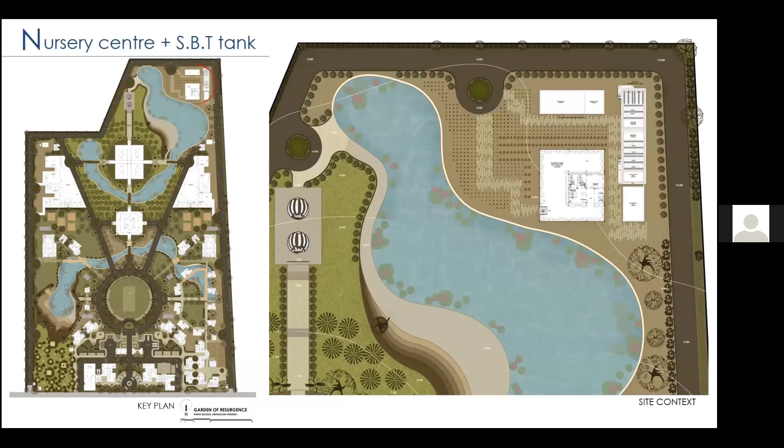The nursery and the SBT tank are the green programs for the site. The nursery consists of memorial plantation and nursery consultation offices with a curio shop. The layout and the details demarcate the SBT system. The capacity of the SBT system is 30 KLD and it operates in an 8 hours per day cycle.

The conservation plantation walkway will be the concluding amenity, where the final talk regarding the entire journey throughout the site would be summed up. The tree trail view explains the different types and levels of walkway and the machan as the viewpoint. The section shows the different halt points and levels of the walkway.

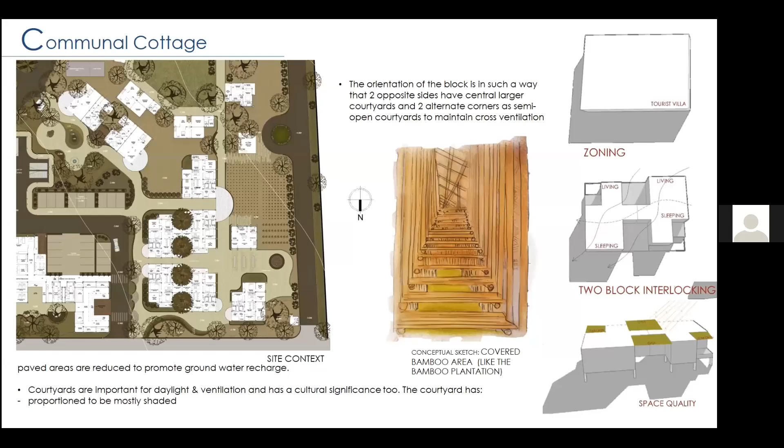Last but not the least are the subordinate programs, that is the communal cottages. Orientation of the block is such that two opposite sides have central large courtyards. Corners are semi-open courts to maintain cross ventilation. The communal cottage blocks are a group of 6 cottages which intend to have maximum communal and socializing spaces. The toilet block positioned near the entrance is to maintain their cultural activities.

The open court acts as an interaction space between the two cottages, while the semi-open court acts as an interaction space with the surroundings, hence maintaining privacy and interactions. The side elevation shows the circular arched openings at the staircase facade and the conceptual view of semi-open court overhangs. Windows in the traditional architecture style were monotonous and simple, as the technique of construction was unknown.

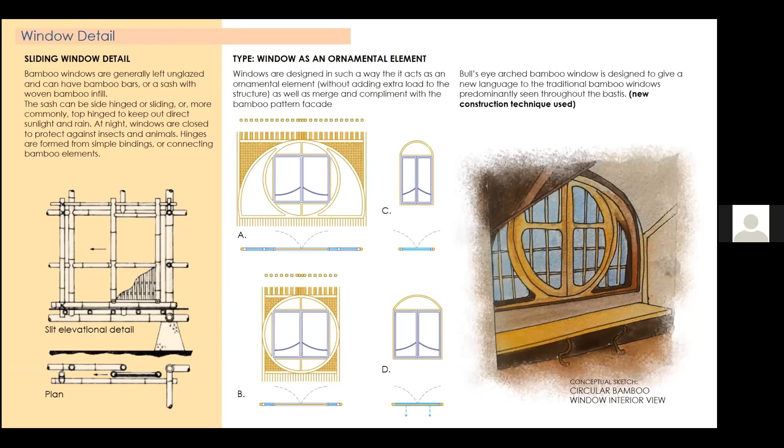This became the whole picture of the Garden of Resurgence, where the edge of the structure and the landscape would create interactions when people from various walks of life would come, speak, and relieve their thoughts and emotions just to have a voice. It always was imagined as this place where resurgence would happen.

Although an imagination for now, I strongly believe that when turned into reality, it would make a difference to the people's life, because it will not only make them feel like it is their own space, but sharing their anecdotes will give them a sort of empowerment to know that even their voices are to be heard.

This simple project tries to make lives of the people in this region better by giving them a permanent platform to come out and talk, share new ideas, and make it their little haven, where these encounters would create the process of resurgence. Thank you.